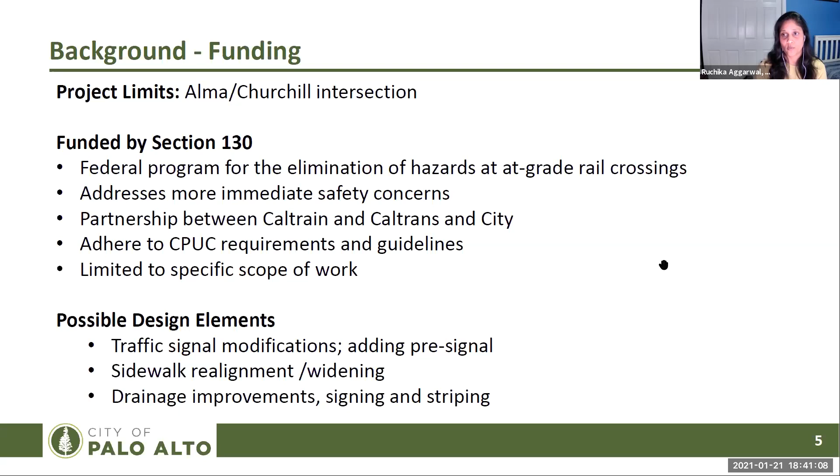A few of the design elements we're looking into today to enhance safety, the primary goal of the project, include adding a pre-signal to avoid queuing of cars on the tracks and allowing them not to stop on the tracks. That would require some signal modifications, potentially relocation of some signal heads and poles, sidewalk realignment and widening to increase storage space for pedestrians waiting at those corners, improving curb ramps for the sidewalks, possibly drainage improvements, and signing and striping to make the crosswalks more visible and brighter.

As I mentioned, there are multiple stakeholders involved in this project. Caltrans is the state department. This is a federal program, so the funding has been allocated by the federal government but is administered through the State Department of California. So they are our funding partner.

Caltrain and JPB, the Joint Powers Board, is the governing agency that owns and operates Caltrain along the peninsula. CPUC, the California Public Utilities Commission, regulates services and infrastructure including rail transit, so they are also involved in this project.

There was a diagnostic meeting held a few years ago, attended by members of the city, the CPUC, JPB, Caltrain, and Caltrans. Based on that meeting, recommendations were developed to enhance safety at this location, and those recommendations are what we are working on implementing as part of this project.

Some of the other stakeholders are Palo Alto High School, which draws a lot of students from the neighborhood across this intersection, and adjacent homeowners.

Some of the technical constraints at the project site include right of way. The city is working along with JPB on improvements for this intersection. The city is planning to implement improvements within the city's right of way, while concurrently JPB is making changes along their right of way, along the tracks, to enhance safety. We have to work around existing utilities already present. Visibility is also an issue because of the train lights and the cantilevers that are present.

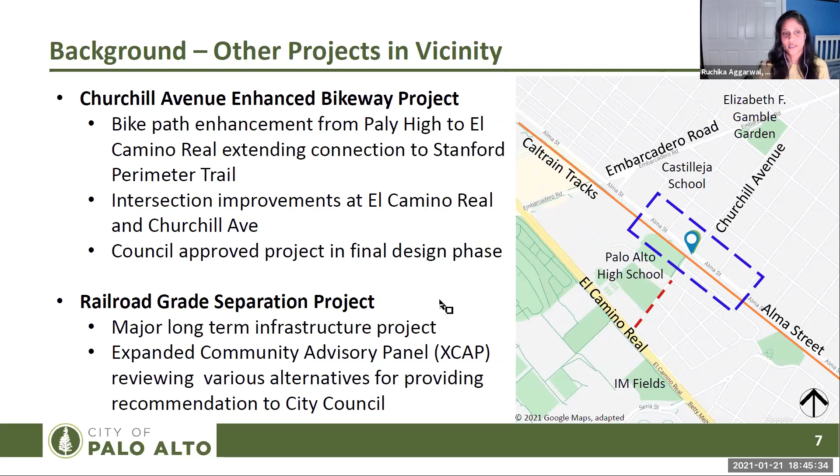So I was hoping to get a sense of who is in the audience by doing a short poll. We'd like to try to launch a 3-question poll now. That'll help us better understand the makeup of the group we have here tonight, and understand how familiar you might be with the project site. Hopefully you see on your screen 3 questions. The first question: do you live near the intersection? Just understanding how close you live, and whether you're within walking distance. Go ahead, read through the question and select the multiple choice response that best describes your situation. We'll leave a little bit of time for you to respond.

Then, hopefully you're moving on to the second question. Why do you typically pass through the intersection? Is it to go to school? Is it to go to work? Is it to do other things? Again, just wanting to understand how you might currently use the intersection.

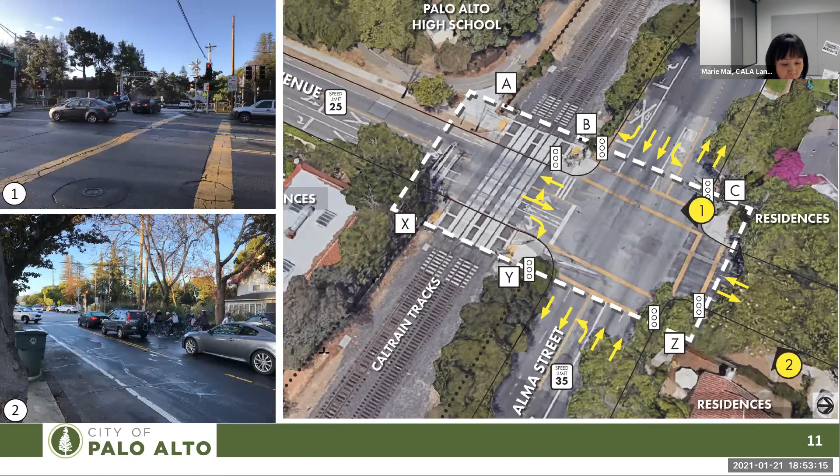Photo number 1 shows a view from location C, looking westbound towards the tracks. You can see a car queuing near the tracks, the railroad gate arms, overhead utility lines and poles, and some of the existing railroad infrastructure and utilities. Photo number 2 at the bottom shows the westbound vehicular traffic during the morning commute.

You can see the students commuting to the school, riding their bikes, and the motorists and drivers queuing there to get through the intersection.

You can see that there is a potential area of constraint at location B, where pedestrians and bicyclists get bookended between the trails and tracks and trains on one side, and cars and roadways on the other. This tends to be a location with high crowding, a lot of queuing, and very heavy use both morning and after school.

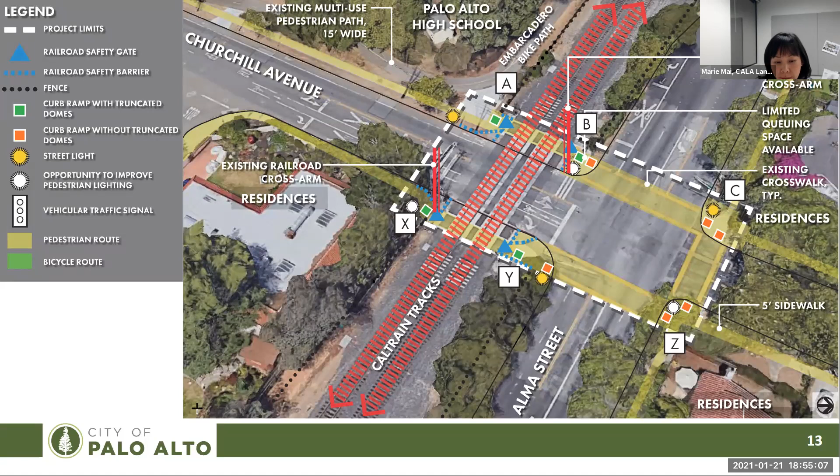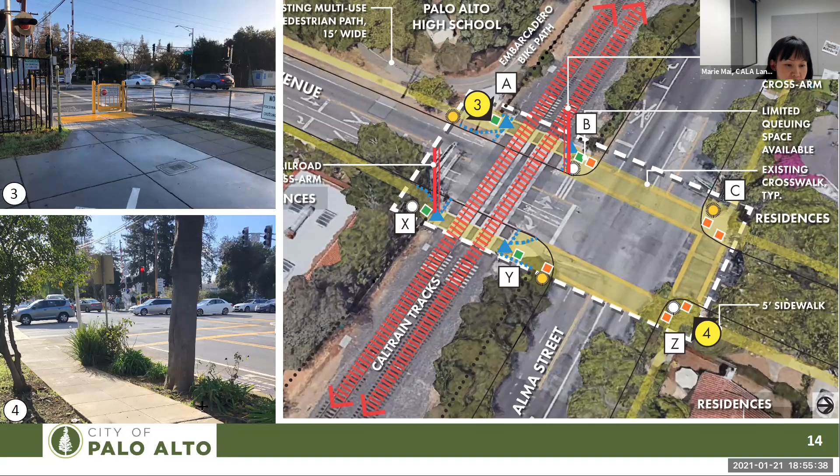Photo 4 at the bottom shows a view from the opposite corner of the street. In the background you see the motorists traveling through the intersection, and also bicyclists and pedestrian students waiting at location B.

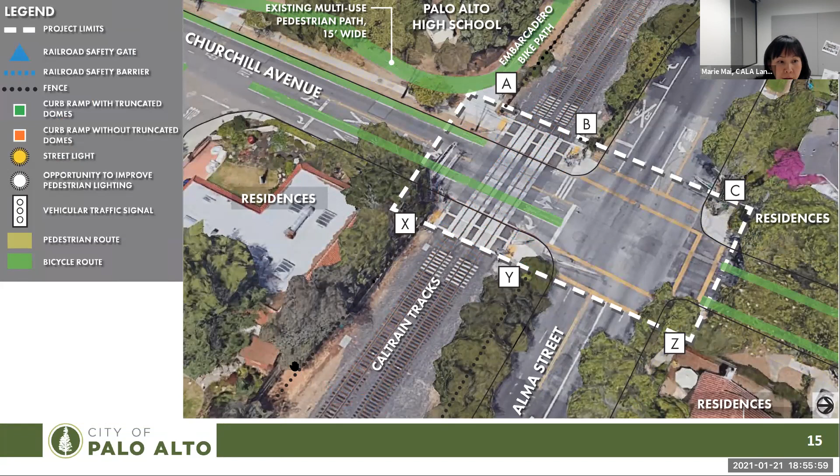So with that overview of the project background and the site, I'd like to walk you through the 2 concept alternatives. Normally we would only develop a design after meeting with you and receiving initial input from the community.

But as Ruchika mentioned early in the presentation, this project does have very unique considerations and constraints related to the railroad and the scope of work limitations, so our options in terms of design are fairly well defined.

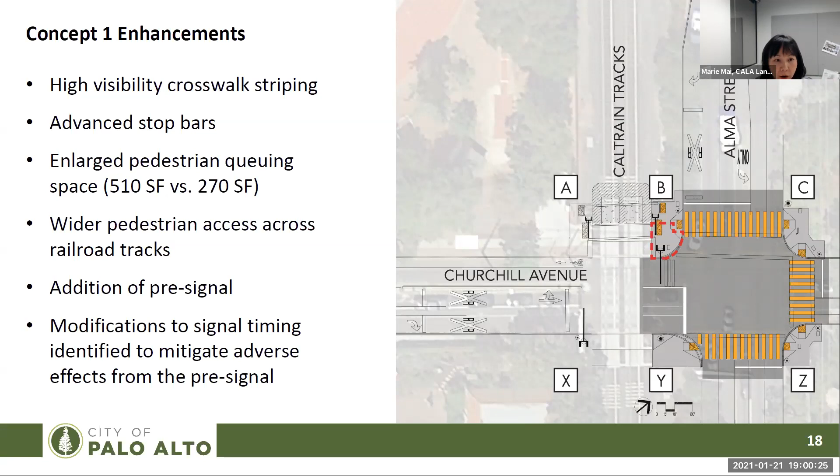One, by removing that right turn only lane, the Alma Street crossing distance is going to be shorter. Shorter is safer. And then also that width of former lane would give us the opportunity to increase even further the potential pedestrian queuing space.

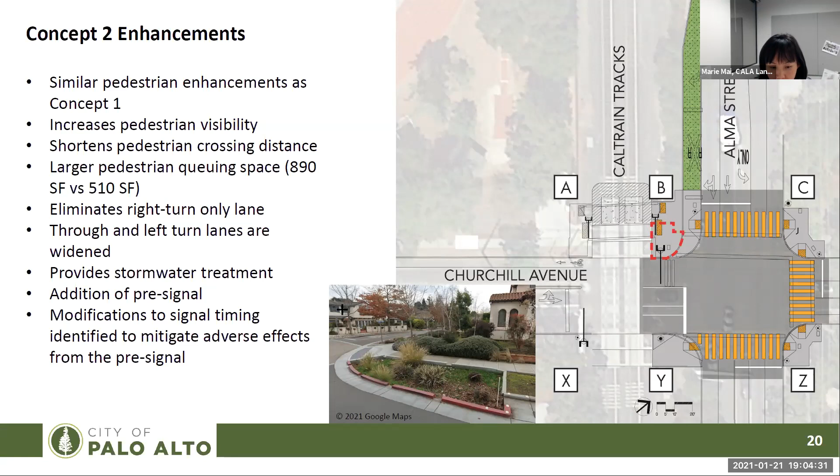So with that, I'm going to switch to the next slide, and we'll be wrapping up our presentation shortly and opening up for questions. This slide shows the anticipated project schedule.

We are still very early in the stages of project development. We're evaluating the two concepts, beginning with today's meeting and getting your input. Then we're going to be continuing through March and April with presentations to a number of groups, including meeting with the Pedestrian and Bicycle Advisory Committee in a few weeks.

We'll be meeting with the school and their safety committee, and then we're going to be bringing it to City Council, roughly in the March-April timeframe. The goal at that meeting will be to obtain Council's approval to proceed with one of the two designs presented today.

That will be a public hearing, and you are welcome and encouraged to attend if you'd like to provide further comments and or show support for the project.

Just to note, for this meeting, residents living within 1,000 feet of the project were notified by mail. In the future, those same residents will be notified by mail of that upcoming council meeting, and also of the second community meeting, which is slated for spring.

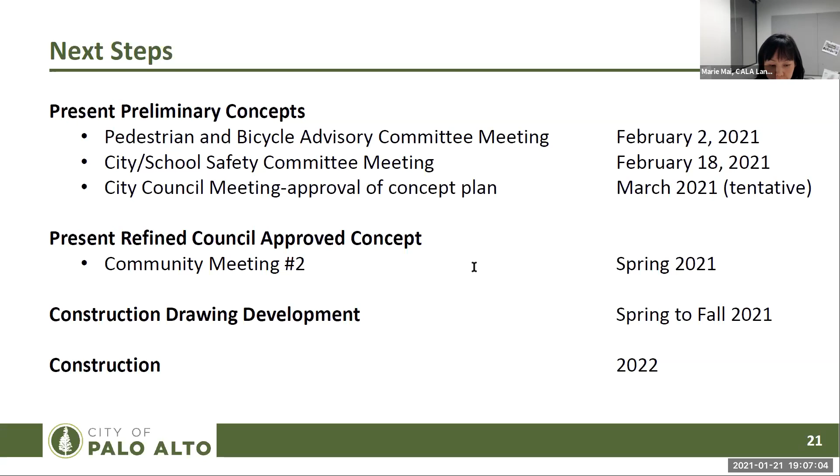Okay, so at this point, we are done with the presentation portion of the meeting. I'd like to open up the meeting to hearing your feedback and answering your questions.

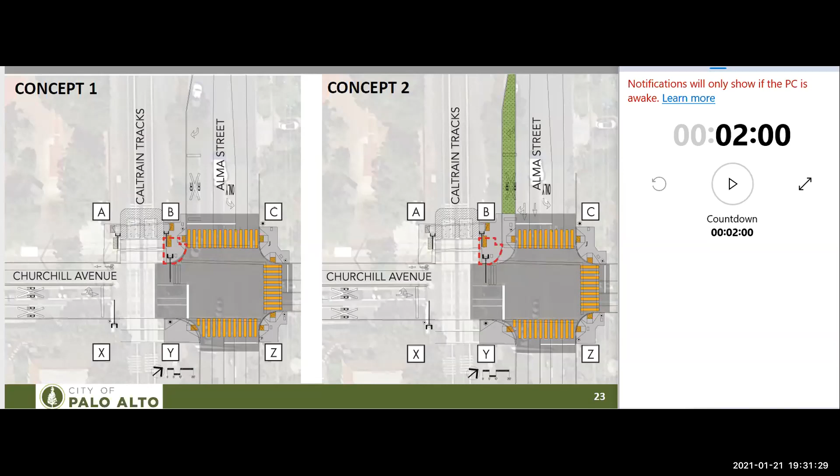I'll share that, although of course we're in uncommon times right now so I don't know that this impact is going on currently, but I previously shared with PD that there was an issue where cars weren't necessarily following the left turn only there. That has been shared with PD previously; they said they were going to step up enforcement there, but that was last time school was in session, over a year ago. That's something we can share with PD again.

Great, thank you for those responses and the clarification, and for that question.

Next we have Sarah with a comment. She wonders if creating a signal or having a crossing guard at the entrance to Paly could help, since car traffic stopping to let students through probably leads to part of the Churchill backup. She realizes it's only a small element of the issue, but it could make a slight difference. We'll thank her for that comment and take it into consideration.

Next comment: can the city paint the bike lanes green so motorists see them more clearly? I believe the Churchill bike enhancement project is proposing to paint the bike lanes green, is that right? Yes, that's included with the early concepts. Ripon adds that the Churchill Avenue bike enhancement project runs from the school entrance to Alma, and will include some of the bike path enhancements, though not at this particular section.

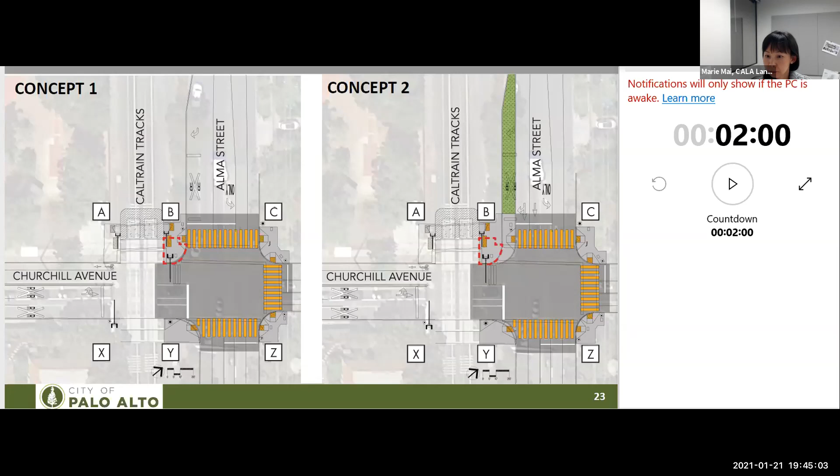As we've got the poll open, I'm noticing one of the questions is asking if we could show the drawings again, for someone who joined late. We might want to put those up so people could respond to the poll with the drawings showing, if that's possible. Yeah, so you should be able to see concept 1 and 2 up on your screen now. Thank you.

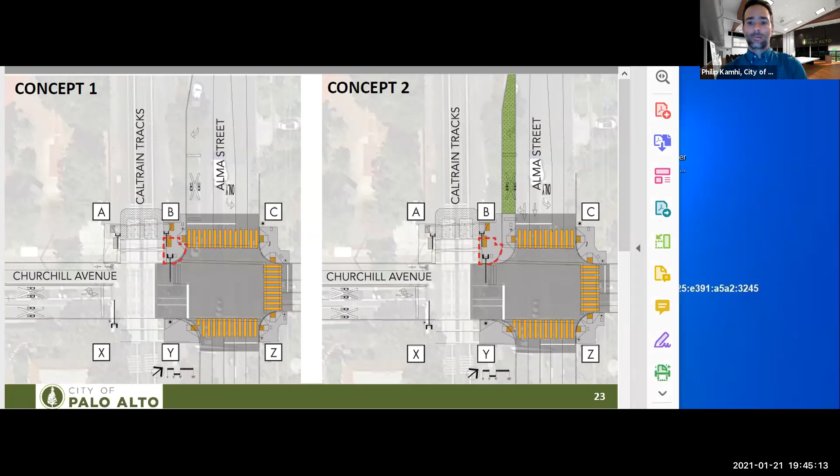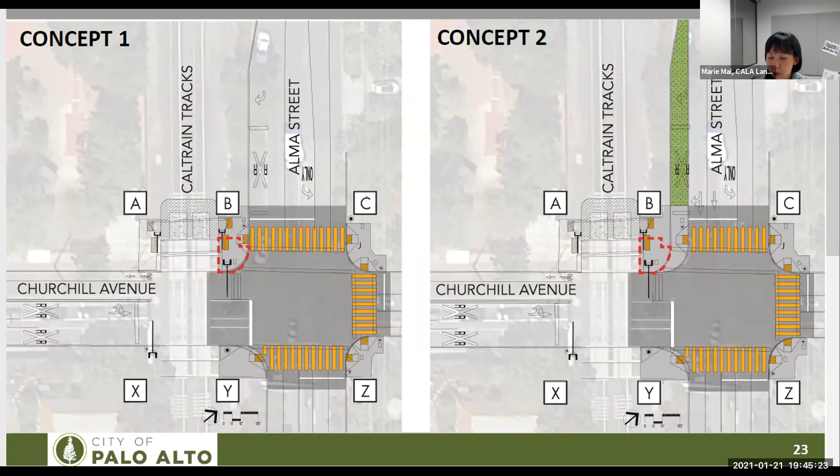So it looks like we've got about 20 attendees. So maybe once we get close to 20, if it looks like we're going to get everyone to respond, that would be great.

And while we're waiting, it looks like Carrie has a hand raised. Is that a new hand raised? Yes, I think it is. Okay, new.